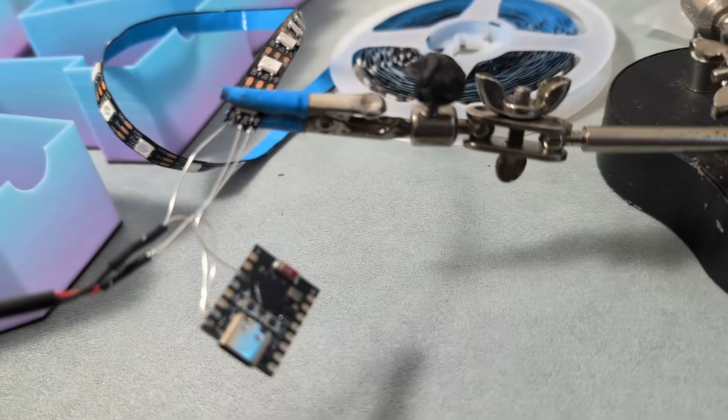Today I'm gonna show you how to design this kind of LED letters where the whole body of the text lights up. Outside is printed in this translucent gradient PETG that I use from this company - I love it, but there's a lot of options available online. For the diffusion, I use white PLA this time, so the LEDs don't show through the body of PETG. The white PLA diffuses all the LED light, creating this nice diffused light instead of LED hotspots.

So let's get into designing. First I start with creating the text file in Inkscape, so create the text.

Now go to text and fonts, find the right font. Apply the edge, a stroke, make that white. Do path, object to path, and ungroup. Okay, can adjust the gaps - something like that.

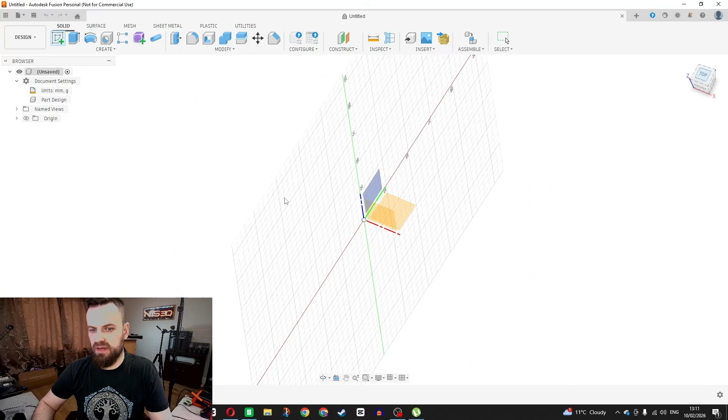In Fusion, I start with a new sketch. We'll size it up as big as we want to - I want it 15 centimeters tall. So I create a box for that, so I can size up the SVG file when I import it.

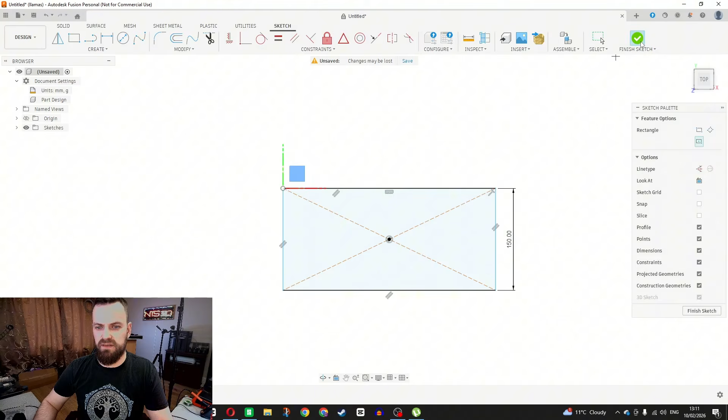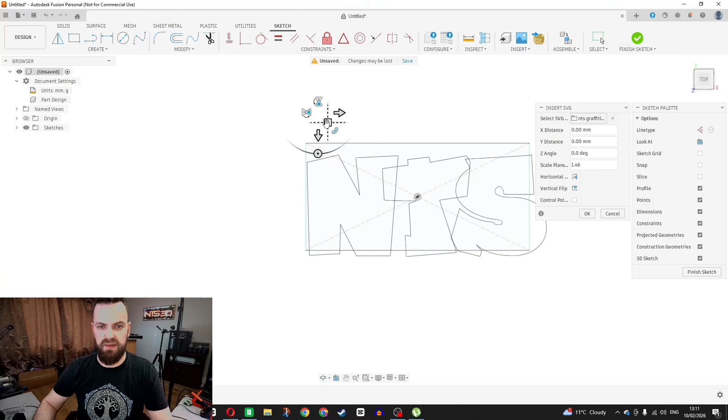I can finish this sketch, start a new one, and then insert the SVG file that we created in Inkscape. That's our file. Now I can scale it up to fit in the box created in the first sketch. That looks good enough.

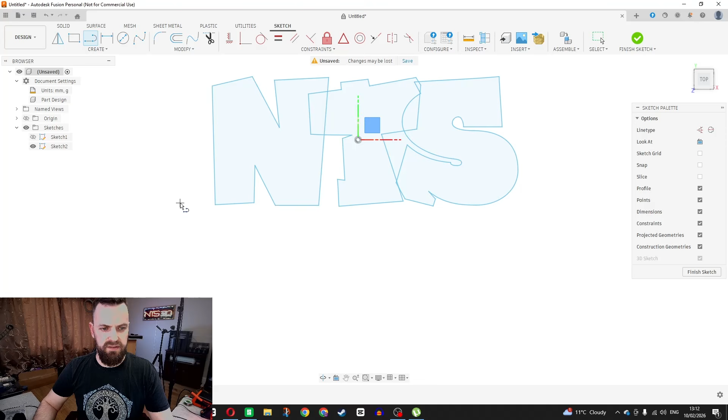Now we can switch off the visibility for the first sketch. Now it's all green. Let's highlight it all, and to fix that, let me actually draw a flat bottom line and fix this a little bit - something like that.

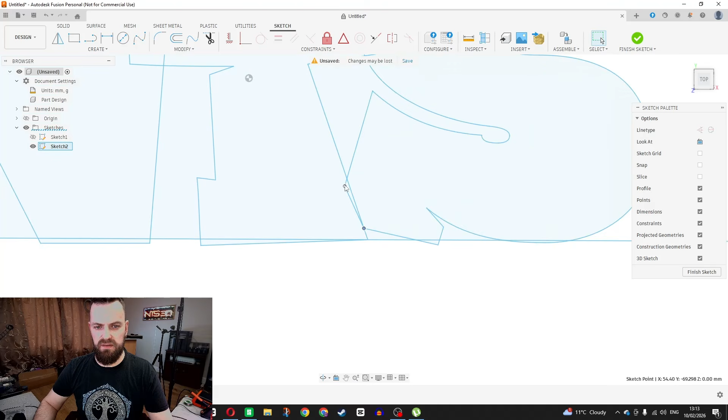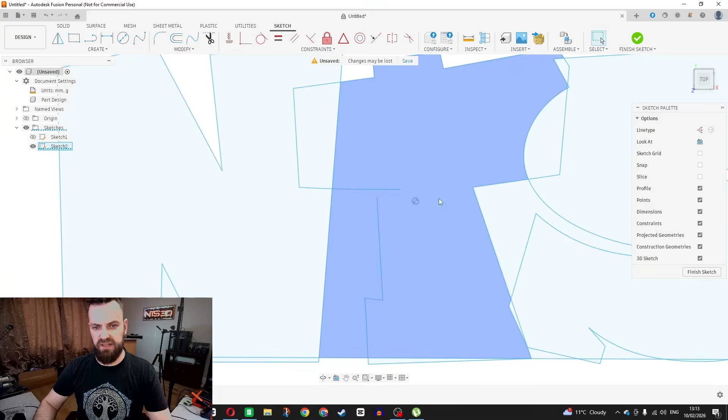Maybe like that. And what I like to do is fix all the sharp corners, because I don't like how they eat into the inside of the letters, especially when they're facing inwards inside the letter. I usually delete them out, edit them out, make it more nice and straight here. Same as here - make it more straight like that.

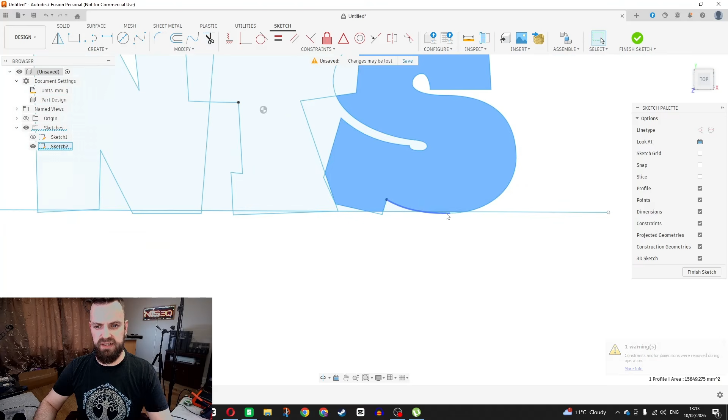Yeah, that looks good. Can start extruding the first letter. Extrude that 40. New body.

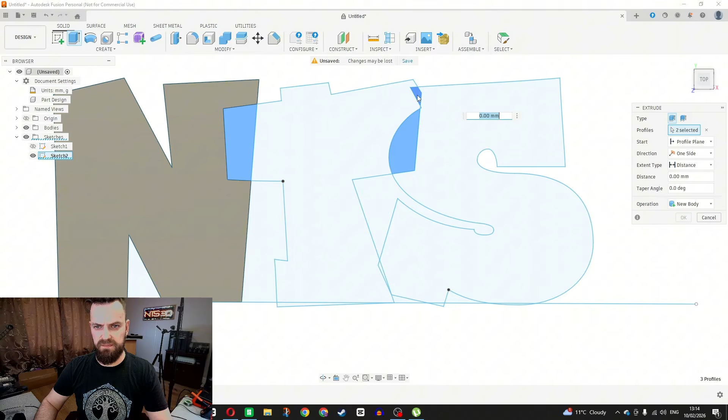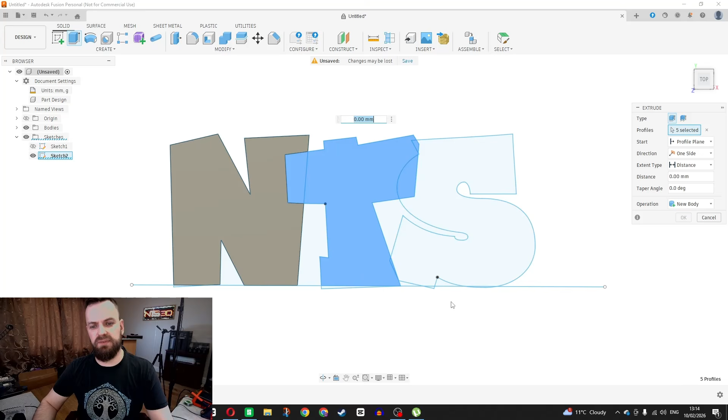Enable the visibility for the second sketch, and then we can extrude the second letter. Yeah, looks good. See what I did? I extrude only everything above the line I created here at the bottom, to make the bottom of the sign flat so it sits nicely on a flat surface.

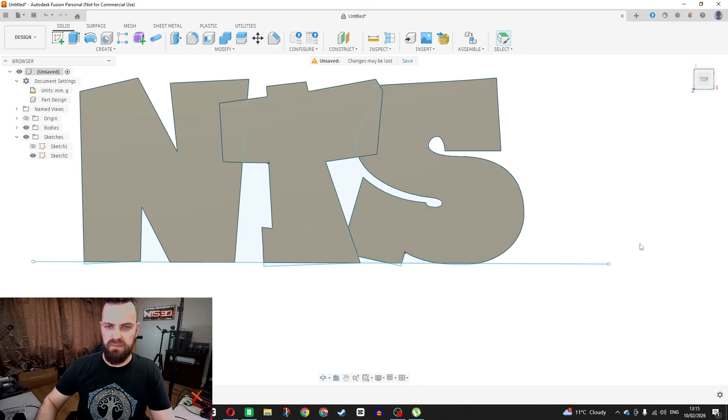Do that 40 as well. Created this new body. And can extrude the last letter - 40 as well, new body. And we have created our 3 letters, and we name them.

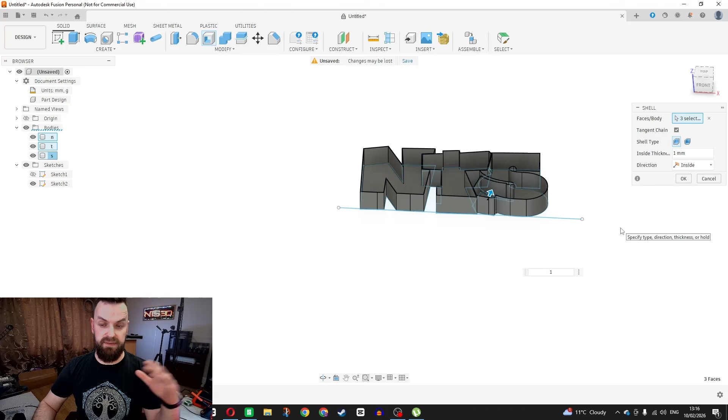And now use the shell command to shell them out to 1 millimeter shells, and that's going to be the colorful outside of the letters. Okie dokie.

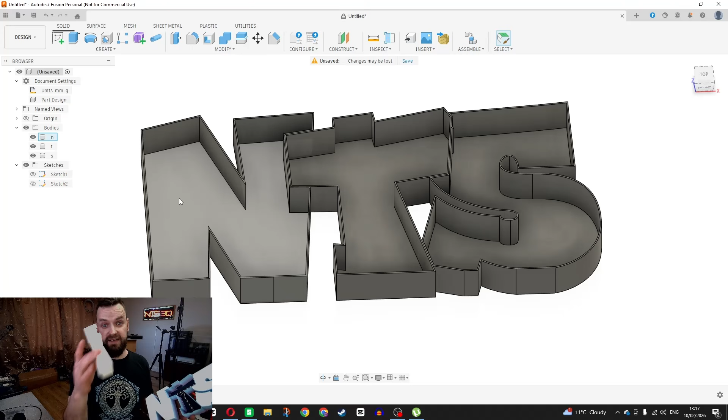You can switch off visibility for the second sketch. Now it's all about offsets. So for the front plate to slide inside of the shells that we just created - the colorful part - we need to create an offset between the front plate and the shell of the letters.

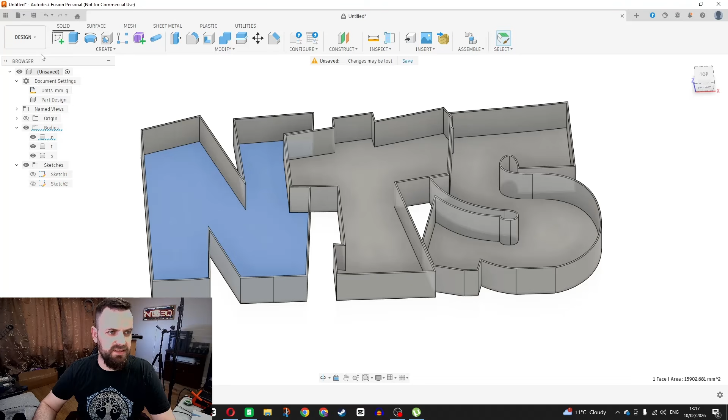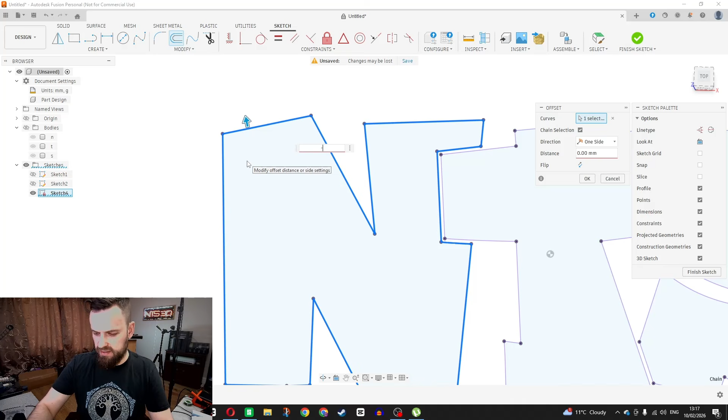I do that by starting a sketch inside the letters. We can project all 3 of them. We can disable the body visibility so we have only the outlines left. And I'll do negative 0.3 inside of the projected sketch, and do the same for all the letters. Just like that.

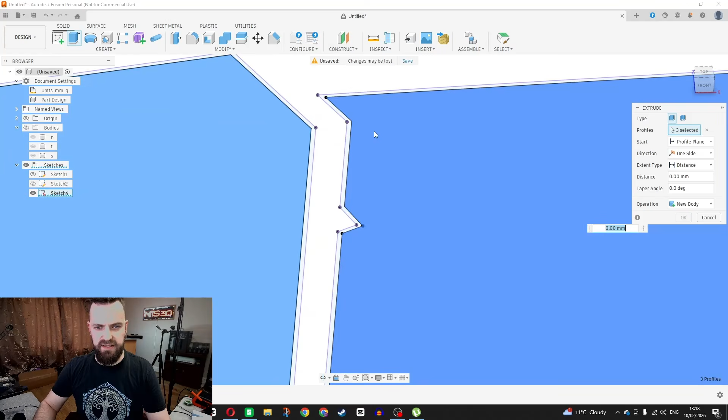And then we can extrude from the inside of the offsets - that's going to be our front plate. 39. I can toggle the visibility for bodies.

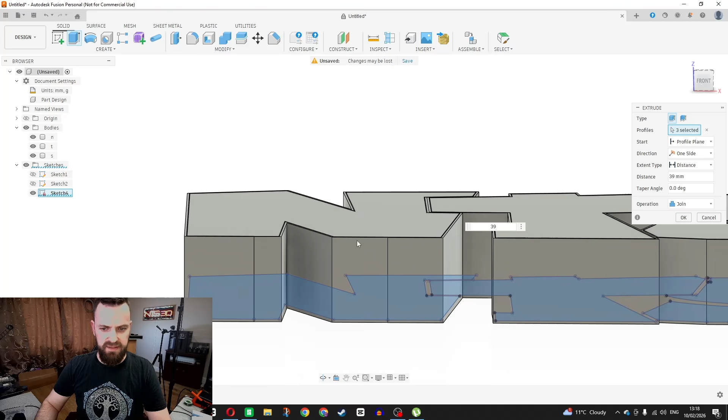And there, that's flush with that, because the back of the shells are 1 millimeter already - that's why we need to make it 1 millimeter shorter. And then it's going to be exactly the same height as the shells.

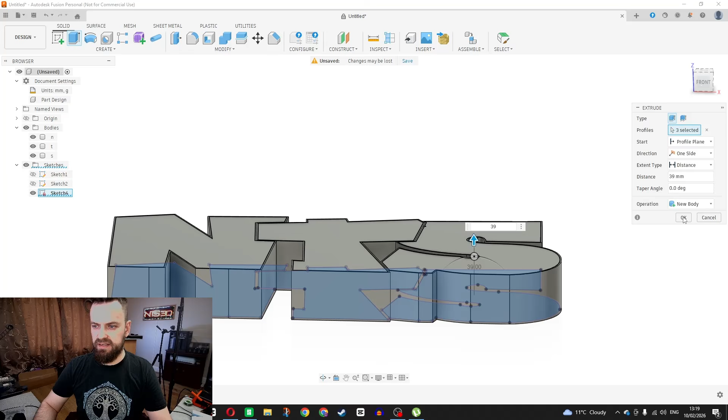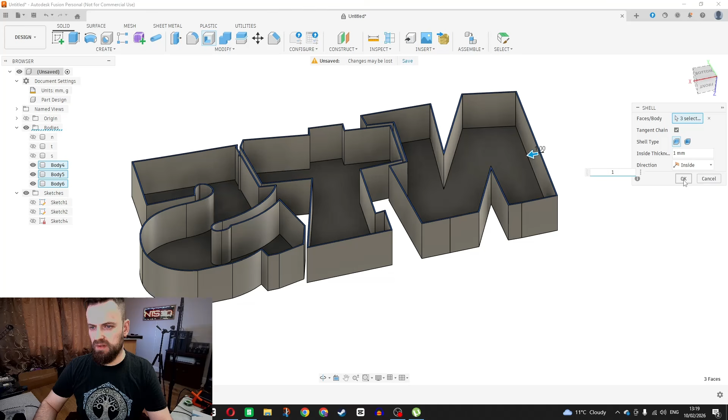Okay, we create new bodies, and then disable visibility for the shells. And we can shell these fronts from the backside to make them 1 millimeter.

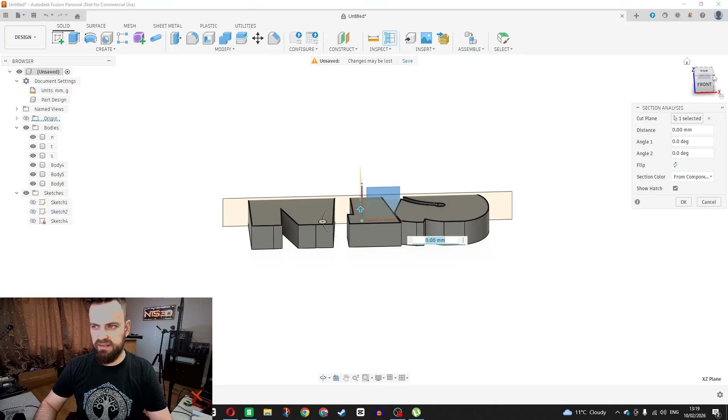Now let's do section analysis to see that we have our front plates here and the shells, and there is a 0.3 millimeter gap between them.

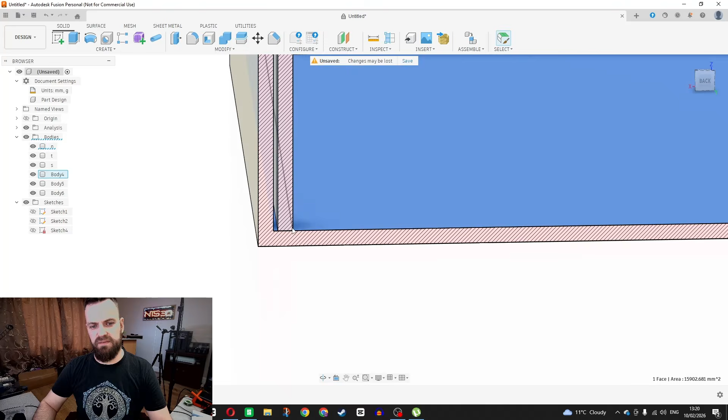What I like to do to make the fitting more secure inside is create another wall behind the front plate on the inside of the shell. That's about 3 millimeters high, which is enough. But with another 0.3 millimeter offset between the wall here, we have to create another offset so we have some clearance there.

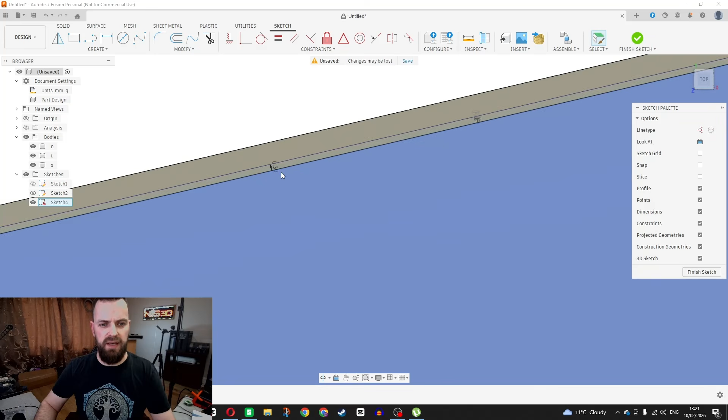So we can untoggle these, switch off the analysis, and go back to the offset sketch and create more offsets. You can offset from this one - that's our front plate here.

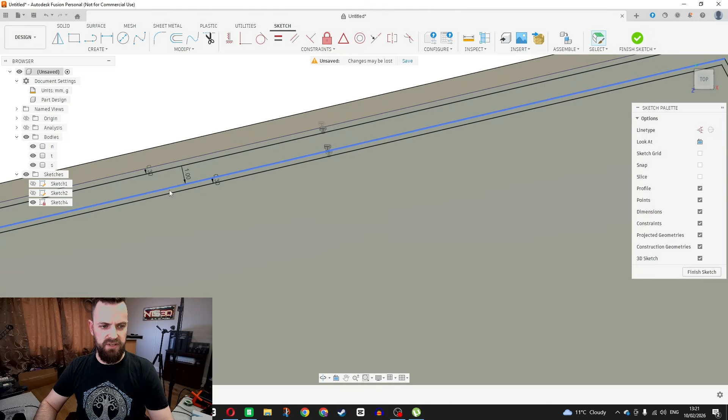And from that, we need to make another offset. That's going to be our gap between the inner wall, 0.3 millimeters, and do another millimeter negative. This we're going to extrude by 3 millimeters.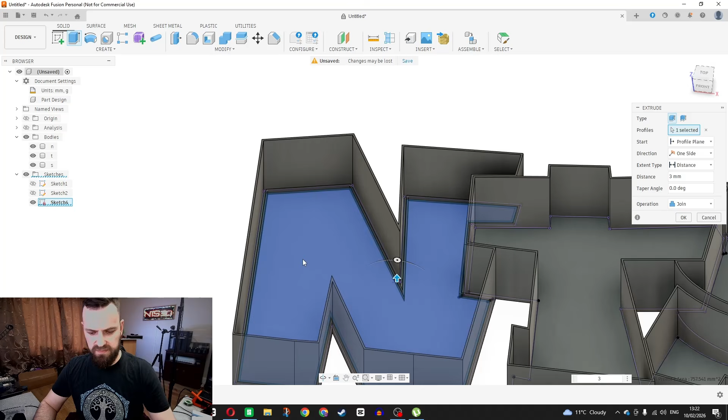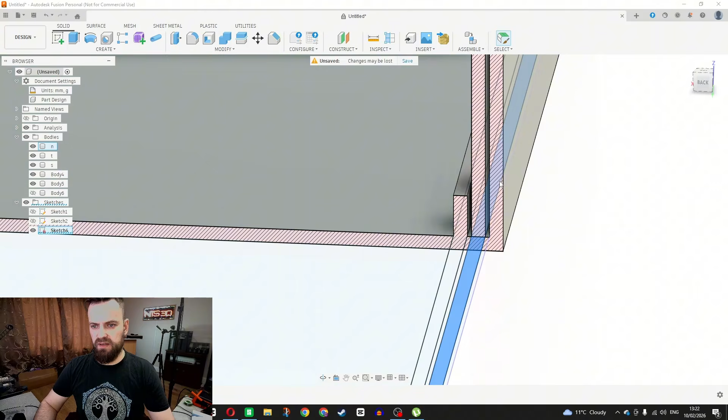That is going to create the inner wall, another little bit of support between the front plate here and the outside shell, so it fits snugly inside, easy to glue inside here. Just apply a little glue to secure everything in place when it's all finished printing.

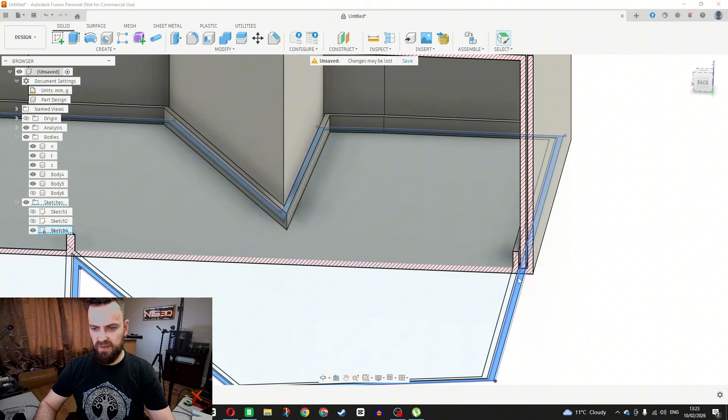So yeah, repeat the same step for all the letters - offset, offset, offset. So there are two offsets: between the outside wall and front plate, and an offset between the inner wall and front plate as well.

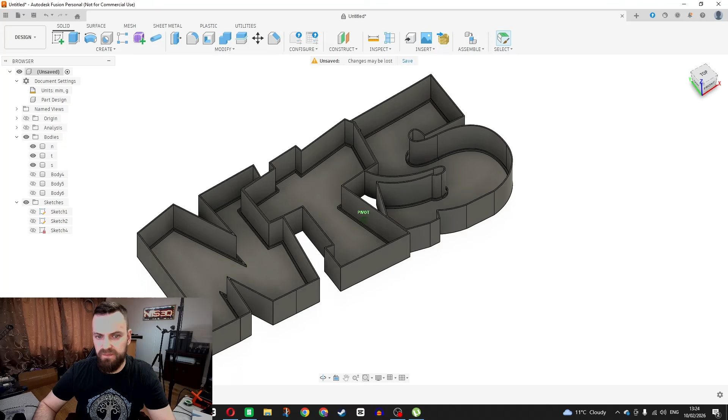Now I have created all of the short inner walls. Now we have to create holes between the letters. We have to enable visibility, even for the front plates.

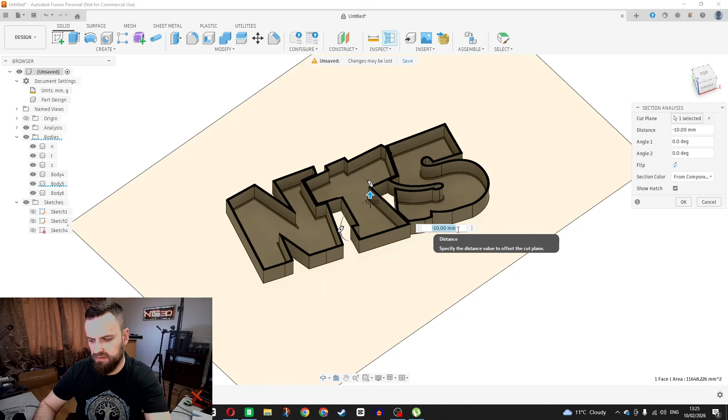Okay, what I like to do is section analysis. Move it a bit down - let's do 10 millimeters. Toggle the visibility, so the front plate and the shell are visible now. We have to create the holes between the letters.

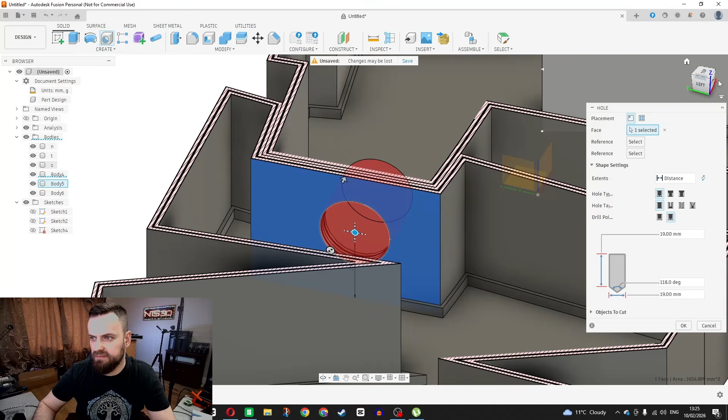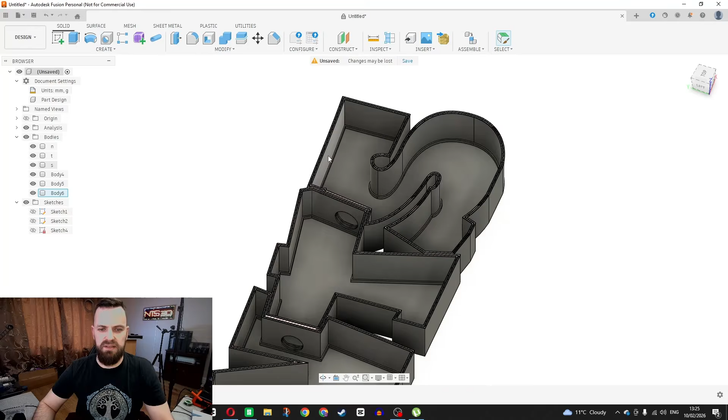To pass through the wires. Perfect. And let's do one here. Oh, that's great. Can switch off analysis.

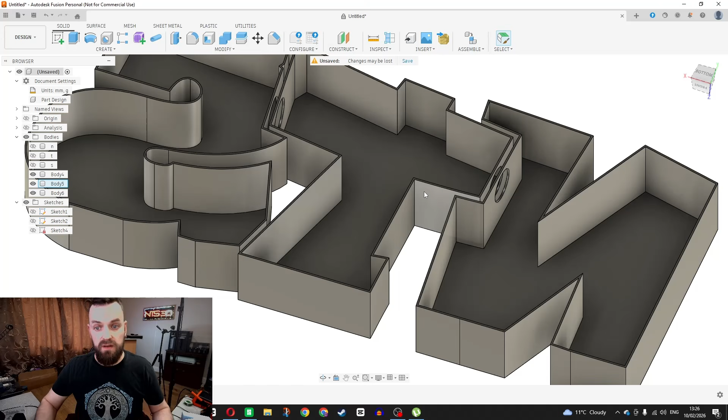And the shells - so these are our front plates. One thing about front plates: the holes have to go all the way through the bottoms.

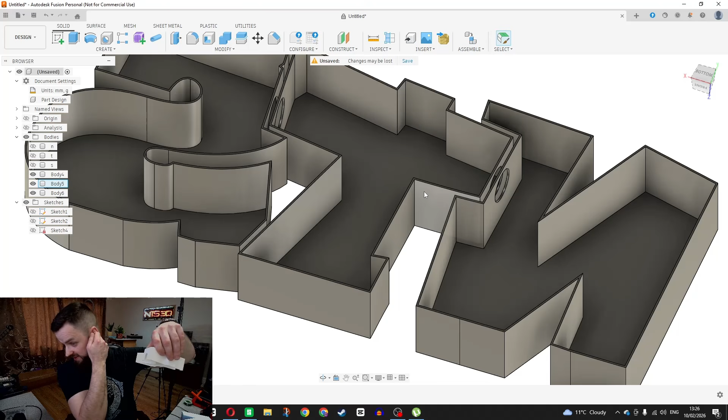Because it's going to go down, and if there's wires going through, it has to go all the way down and let the wires pass through like that. So yeah, we have to make sure there is a hole all the way down to the edge here.

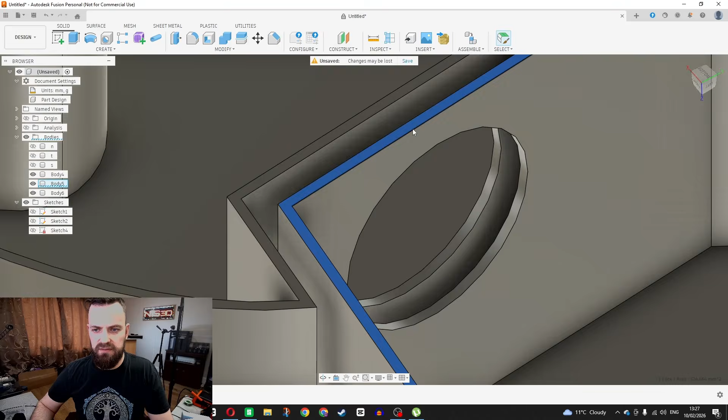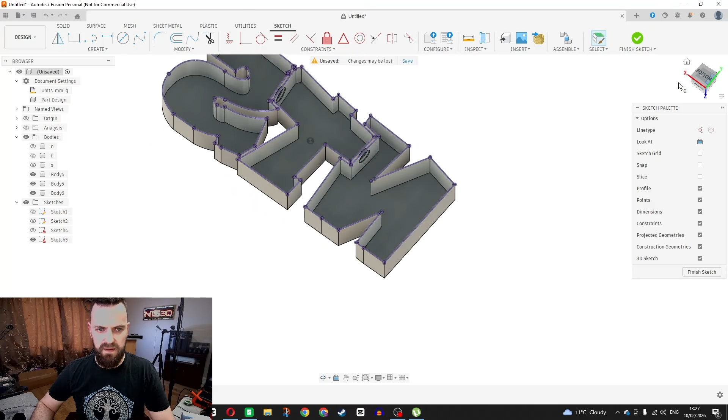What I do is create a sketch on top of this edge here, create a new sketch. Then we can project all these edges, and then go ahead and project the holes as well.

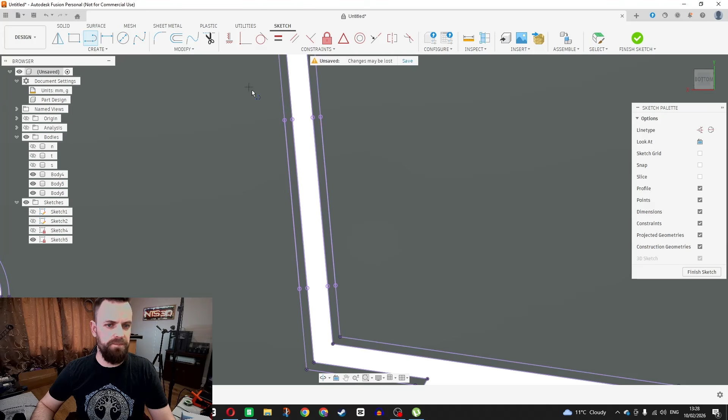Like so. And then it creates the little dots here where the holes are projected. And then you can just sketch in the lines between the holes so we can extrude them downwards.

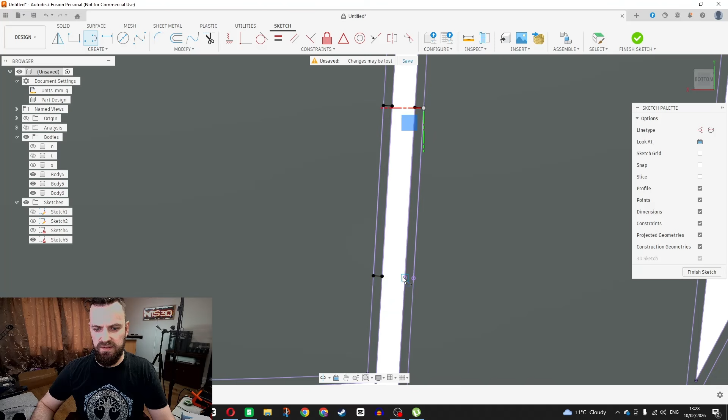That's sketched, and now we can extrude these parts and extrude them down to cut, like so.

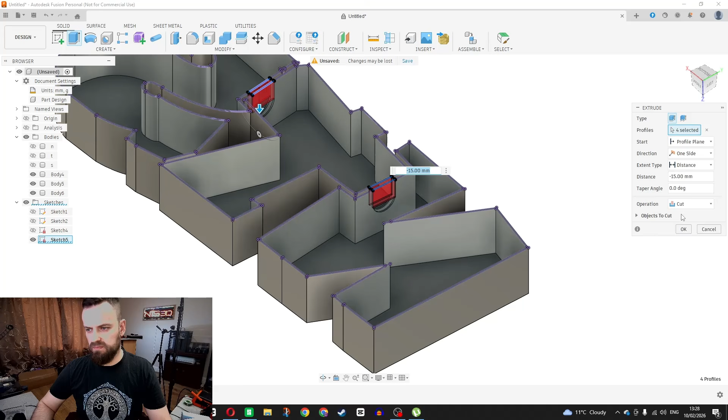And it creates the slits now, so they can slide all the way down, even when the wires are going through the holes for the shells.

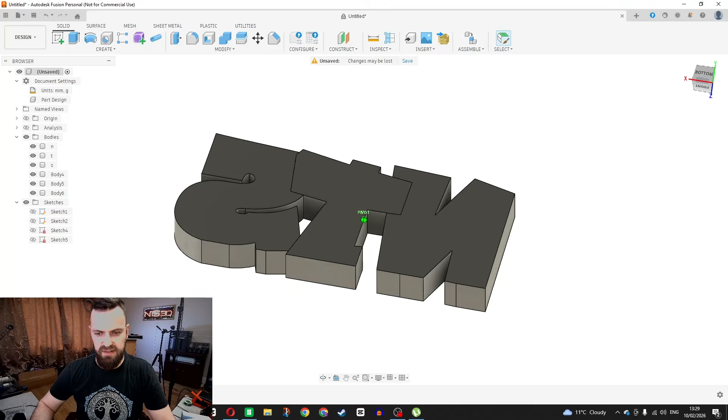And that's it. We create another hole at the back for wires to pass through.

So yeah, save the files, print, and you're all sorted. I hope it helped you. Yeah, it's nothing too hard.

It's all about offsets and, yeah, creating enough clearance for the parts to slide together.